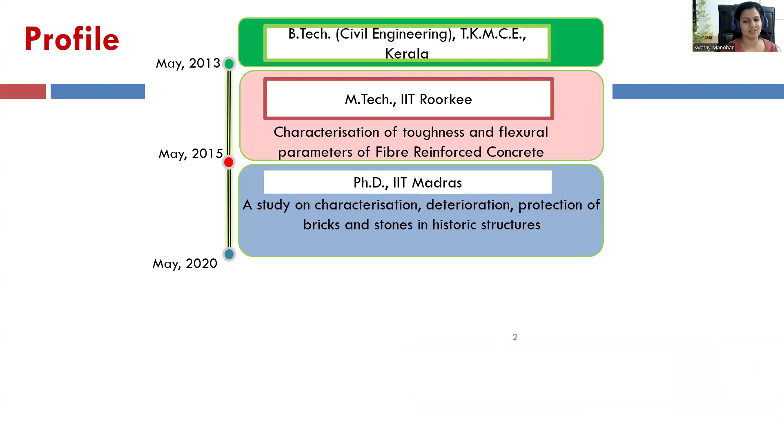I'll start with a brief bio of myself. I did my bachelor's in civil engineering from Kerala, India in 2013, followed by master's from IIT Roorkee. Then I did my PhD from IIT Madras, where I worked on understanding degradation mechanisms in historical structures, basically salt crystallization phenomena, followed by a brief postdoc at IIT Madras and an early career fellowship at IIT Gandhinagar. Then I joined IIT Bombay as an assistant professor in 2022. I had a brief stint at ETH Zurich as a visiting faculty from September to December 2024 as well.

Now I'll start with a roadmap for the next 15 to 20 minutes. I'll talk about what is salt crystallization, why does it happen. Then I'll go more into the role of the pore system of the materials in governing salt crystallization. We will do this on the basis of 3 different case studies: building stones, fired clay bricks, and lime mortars.

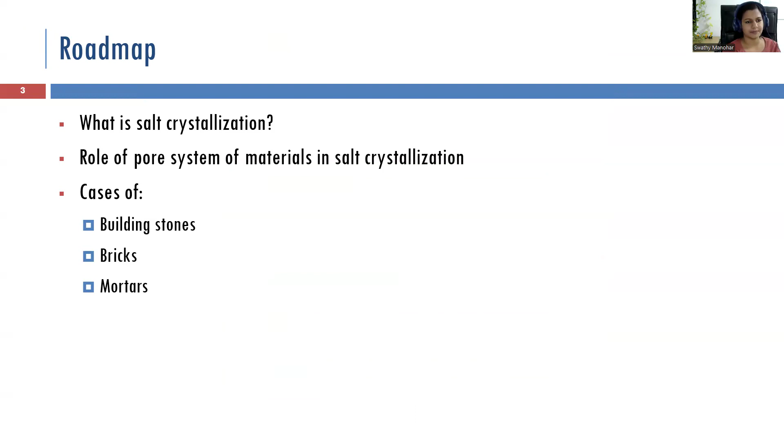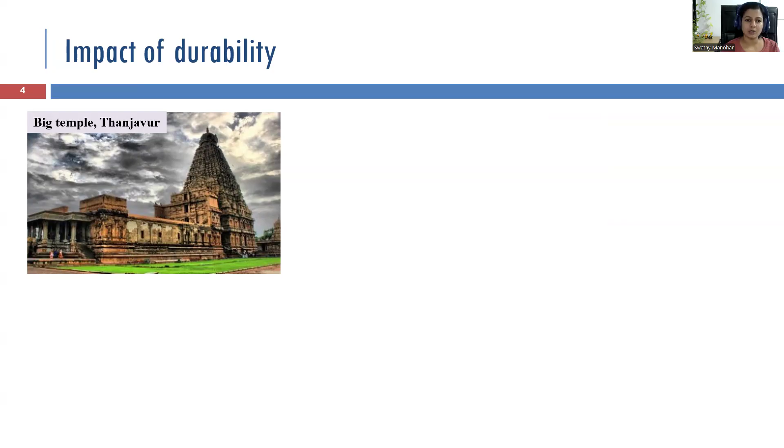Starting with the impact on durability. This is the Big Temple or Brihadeshwara Temple in Tamil Nadu, India, which is made of granite, constructed in 1010 AD, and is still sturdy. But if you look at modern structures, we see damages in less than 10 years or even much lesser than that.

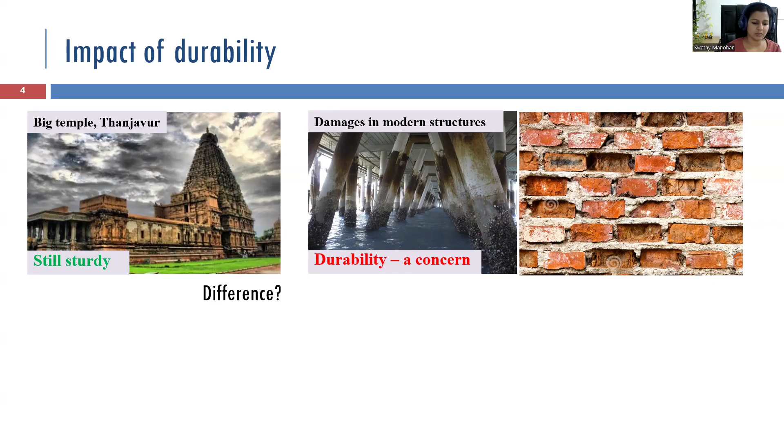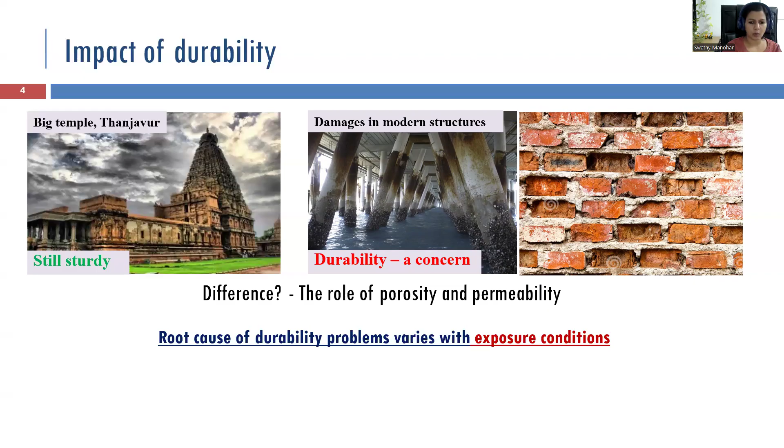The emphasis is that it's not the strength that determines the damage, it's the durability, which is basically because of the porosity and permeability of these structures. This response differs with respect to the exposure condition—if it's because of salt, wind, or air pollution—so there are different durability problems associated with different materials.

If we understand the mechanism of this degradation phenomenon and its relation with the microstructure, or porosity and permeability, can we actually scientifically design building materials for longevity? This is a potentially interesting question that we will be able to answer by the end of this presentation.

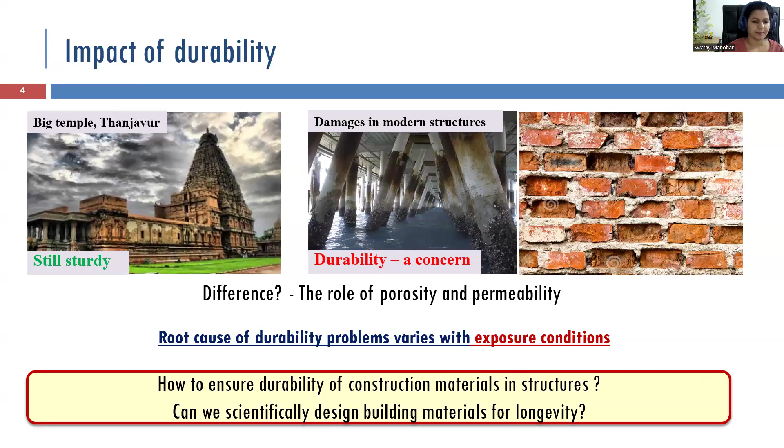Coming to salt crystallization, the first disclaimer is that it is one and the same as physical salt attack, especially when we talk about sodium sulfate. The general name for sulfate attack is generally chemical sulfate attack. But in physical sulfate attack, or physical salt attack, or salt crystallization, you will not have any chemical interaction between the salt and the substrate material. It's only the chemical reactions within the salt, or salt with water.

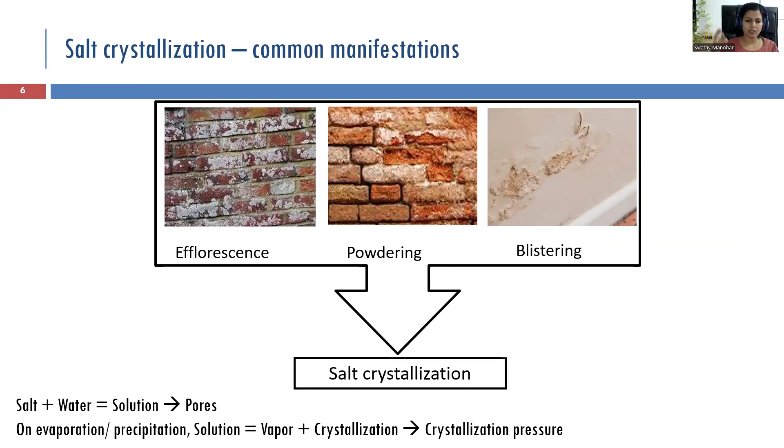What are the common manifestations of salt crystallization? Efflorescence, the white patches you see, powdering, blistering—all of this is because of salt crystallization, which is salt and water from the atmosphere getting into the pores of the system in the form of salt solution. What happens on evaporation? They slowly come out, the vapor will escape out and salt will precipitate on the surface, which is efflorescence, or the white patches you see.

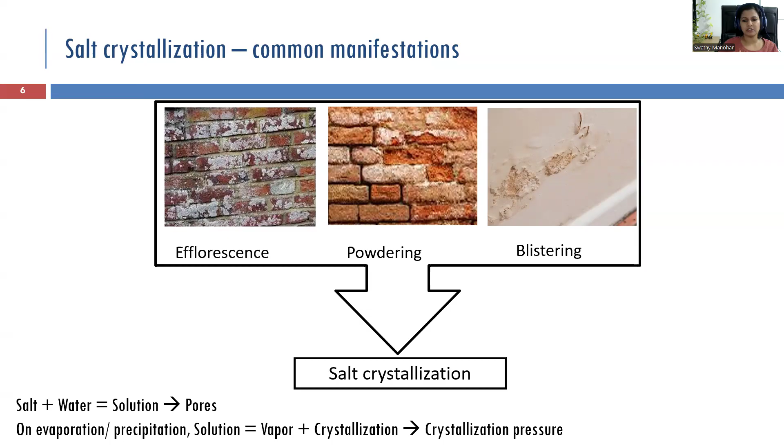If the evaporation rate is much higher, vapor could escape easily directly from the pores and the salt will precipitate inside the pores. This is more damaging because now the crystals can create something called crystallization pressure to the pore walls, which could damage your material.

This is called crystallization, which is identified as one of the most prominent damage mechanisms in historical structures. Not only in stone or brick structures, but even in concrete structures this is prominent. You see examples of concrete, stone, as well as brick structures which are susceptible to salt crystallization damage here, and the extent of damage it can go to.

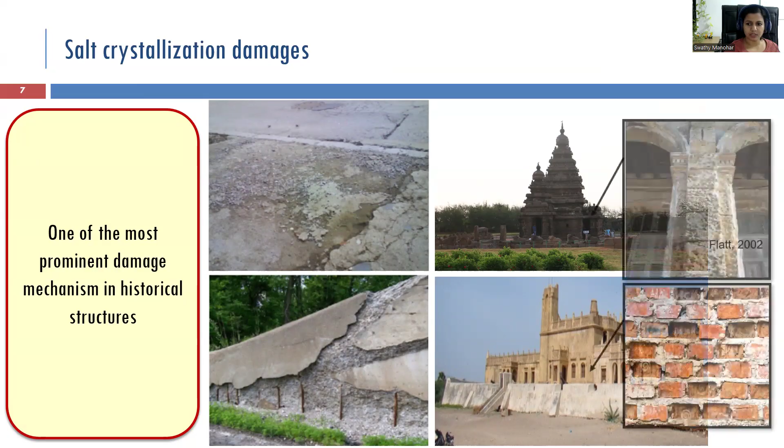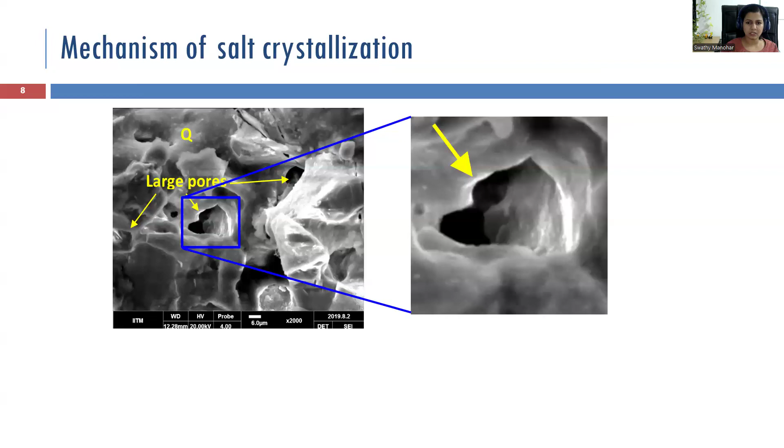What is the mechanism of salt crystallization? I'm going to show this based on one of the SEM images from one of my fired clay brick samples, which was found to have larger round pores. So in large round pores, with subsequent dry-wet cycling, salt solution gets in and becomes more and more concentrated or more saturated. When it reaches supersaturation, the crystal precipitates.

And you see, this is a large round pore. The crystal is free to grow in all directions. There is no restraint or constraint for the growth, so it will not cause any pressure to the pore walls. It's free, stable, settled there, growing. So in larger pores, crystals are free to grow in all directions, so it doesn't cause damage.

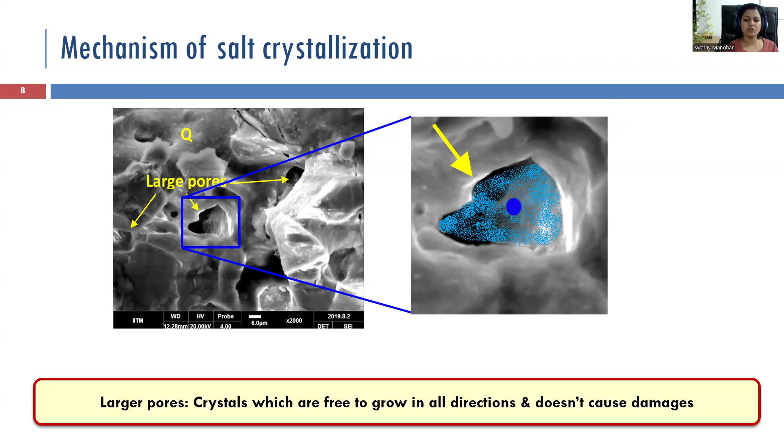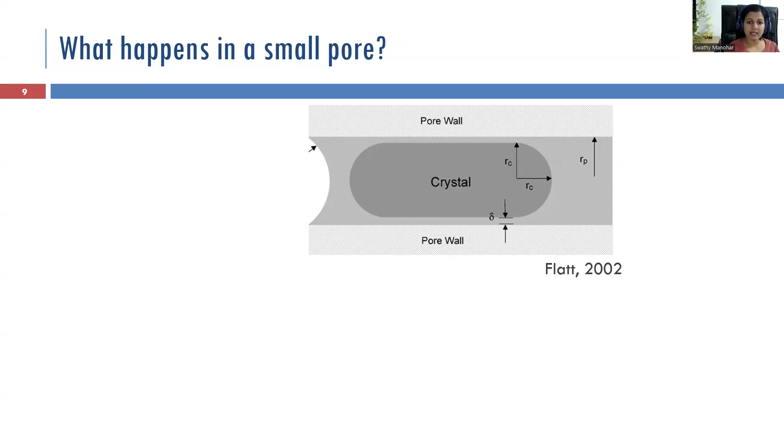This is not the case in a smaller pore. Here you are seeing a smaller cylindrical pore with pore walls on the sides and the crystal being stabilized inside. The crystallization pressure will arise here based on the thermodynamic balance of Gibbs free energy. I want you to look at the crystals first at this end. The ends of the crystal have a hemispherical shape, hence the curvature is very large there. The solution touching that curvature should have a very high supersaturation to balance the free energy there.

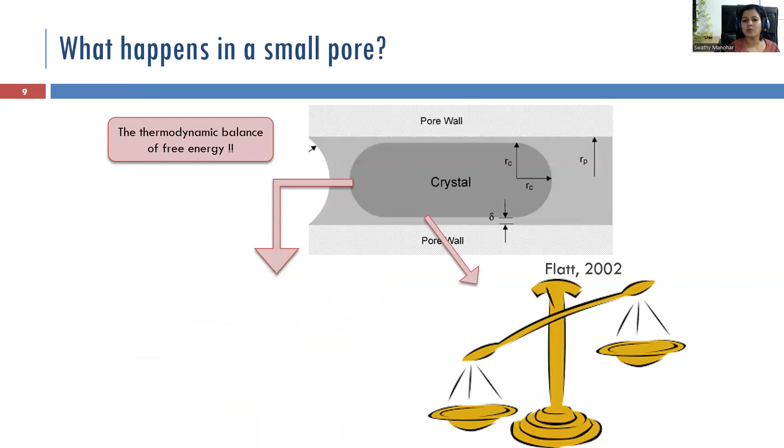The supersaturation of the solution is going to be very high in the water or in the solution to balance this high curvature. But on this side, the curvature is almost half of the curvature at the hemispherical ends, so it's very small. But the supersaturation of the same solution is already very high.

So the Gibbs free energy associated with this excess unwanted supersaturation will generate some crystallization pressure acting on the pore walls. This crystallization pressure and the smaller curvature will balance the high supersaturation here.

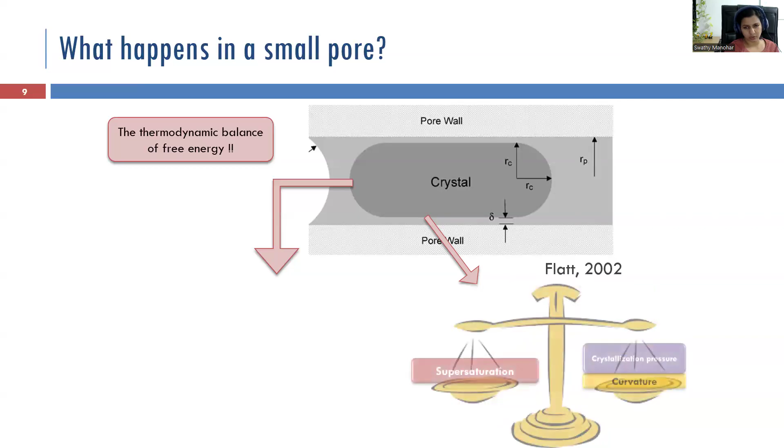Now you have crystallization pressure on the pore walls. This will generate hoop stresses around the pore walls. If the tensile strength of your material is higher than this hoop stress, you will not face damage. But if the hoop stresses are higher, you will have cracks and damage initiated. That is how crystallization pressure causes damage in your system if you have smaller pores.

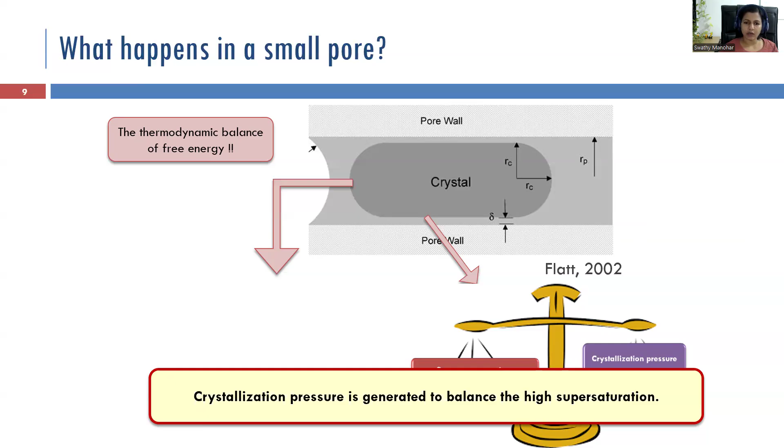Now we look into the case studies.

First is a case study of a building stone, a highly porous limestone called coral limestone or coral stones, from Sri Ramanathaswamy Temple in Rameswaram, India. What you see here is the X-ray diffractogram and scanning electron microscopy of the material.

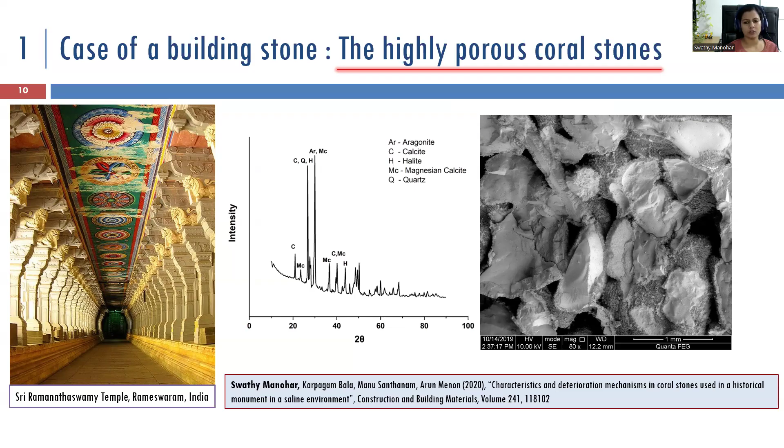The speciality of this particular stone is that it's very light. The density is very close to water, so it can actually sometimes float in water. Looking more into the microstructure, we found that the quartz crystals are surrounded by a lining called magnesium calcite, which had a flowery petal-like morphology, making the overall material much lighter and porous.

Because of these larger pores in the system, when we subjected this stone to accelerated salt weathering, we saw it had very high resistance to salt weathering. Now you know why: salt can easily go and get deposited in the larger pores, and there are not many smaller pores in the system, which helps avoid damage.

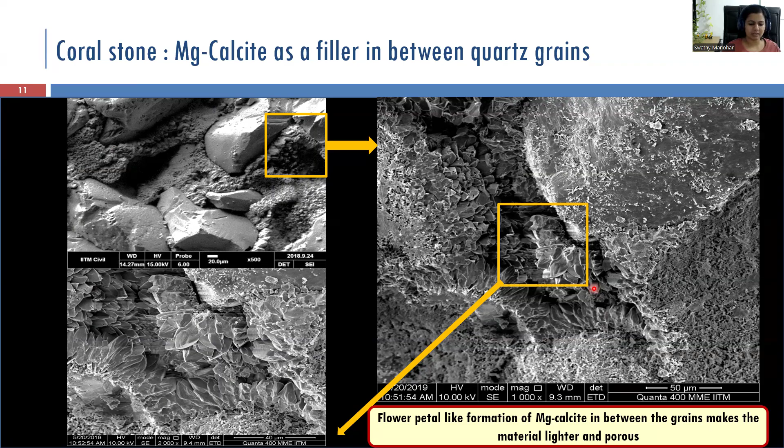Another interesting observation was that there was larger, more porous magnesium calcite lining, and also smaller porous calcite. But when we looked for precipitation of sodium chloride crystals, we saw the crystals were only in the larger magnesium calcite pores, not in the smaller calcite pores at the bottom. The reason is something called preferential deposition of salt precipitation.

This is because when you have connected large and smaller pores, the supersaturation will drain from the smaller pores to the larger pores, and crystals would deposit in the larger pores, sparing the smaller pores. This would also be one reason for the high salt weathering resistance of the coral stones.

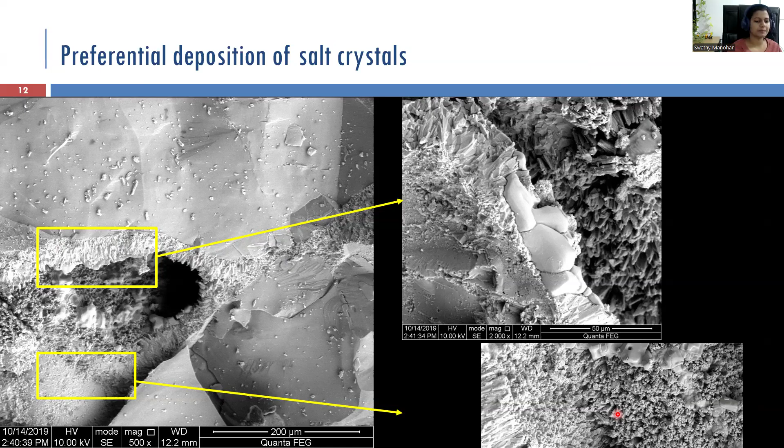Now we go to the second case study, which is fired clay bricks.

These are porosity data of different fired clay bricks of different porosities. In the histogram for one sample, for example V1, out of 100% porosity we have divided it into pores of different size ranges. For V1, the blue color, which is 30%, is the macroporosity, pores between 10 to 100 micrometers, and the top is the microporosity.

Everything in the red boxes are the same samples after weathering. So this is V1 before weathering and this is after weathering. What I want you to see is the last two cases, sample C1 and C2, which have larger pores in C1 and smaller pores in C2.

After weathering, you see that in C1 the macropores remain the same, with no much change. Small redistribution occurs in the microporous range. Whereas in C2, macroporosity increased so much, almost double.

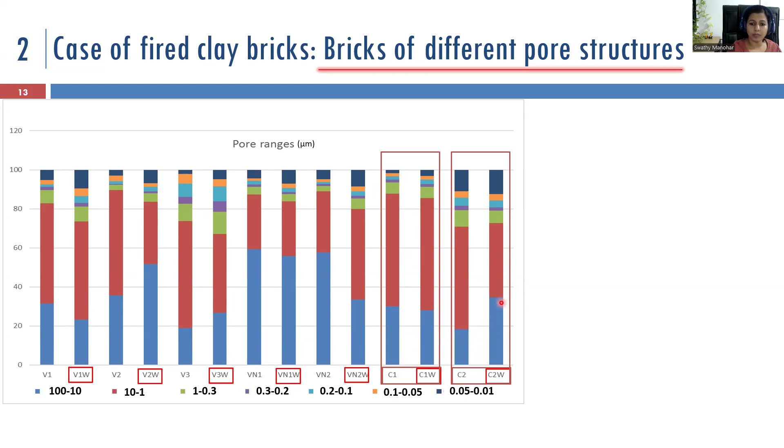Now you see how the manifestation looked like. C1 did not have much damage other than superficial mass loss, which is progressive. But in C2, total crumbling of the sample occurred. Do you want to know why? In C2, the microporosity was close to more than 15%, but C1 had much smaller microporosity.

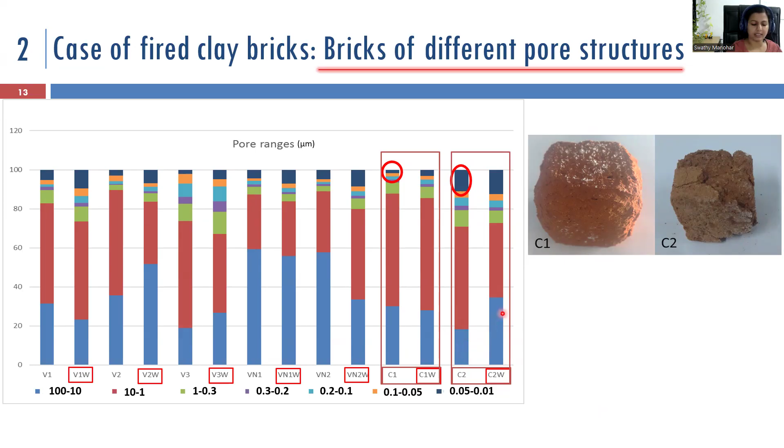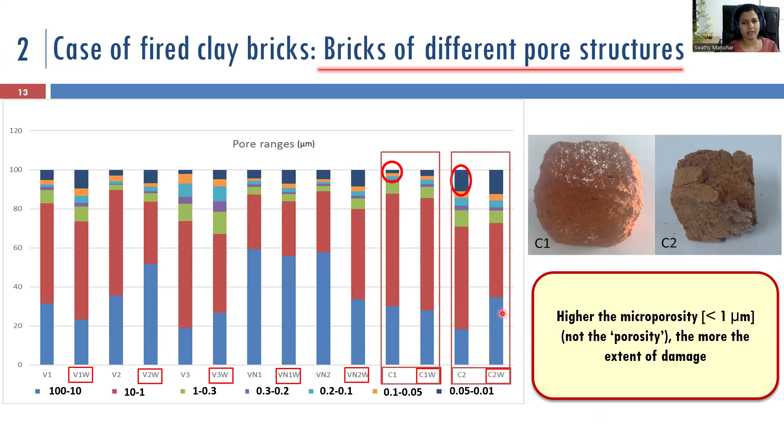We already know that salt crystallization will happen only in these micropores, which are damaging. This material had a large amount of microporosity, which resulted in damage, and you can see here how more cracks and fissures are formed in the material. That's why the macroporosity is increasing. The major conclusion is that if the microporosity, which is pores less than 1 micrometer, is higher, the more susceptible it is to damage. So it's not the total porosity we should worry about, but the percentage of microporosity in a system.

Also, it has smaller ionic sizes which can go into the smaller pores and get deposited, not causing damage in the samples. Now, comparing the efficiency of different coatings, we also saw that the second one, which is a silicone-based coating, performs very badly because it would be acting as a complete sealant over the samples.

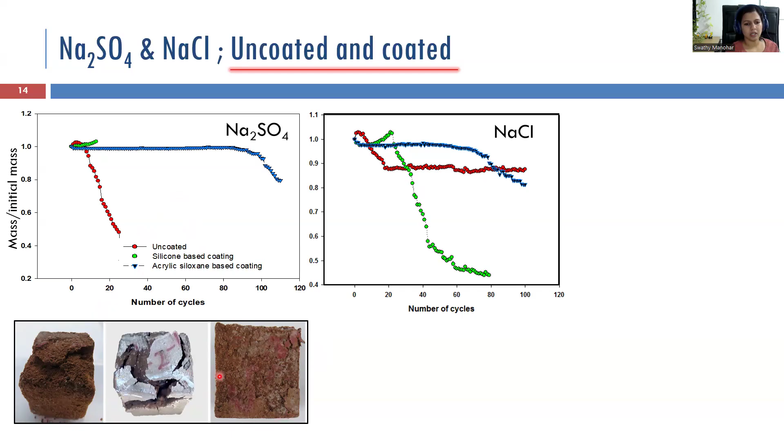Which would create stresses inside the material and cause it to crack and open up. But when we have acrylic siloxane based coating, which has a tendency to form cracks during the exposure period, it would help in releasing the stresses out. So if we are giving the right coating which is compatible to the particular material and salt, it would perform better in the long term. Same is the case with sodium chloride as well.

So the takeaways are: with sulfate, it is crystallization damage. But in case of sodium chloride, only salt deposition happens inside the material in the micropores. Coming to the coating, sodium sulfate exposure in microporous bricks, which are more damaging, needs a breathable coating compatible to the matrix, which is found to be acrylic siloxane based coating here.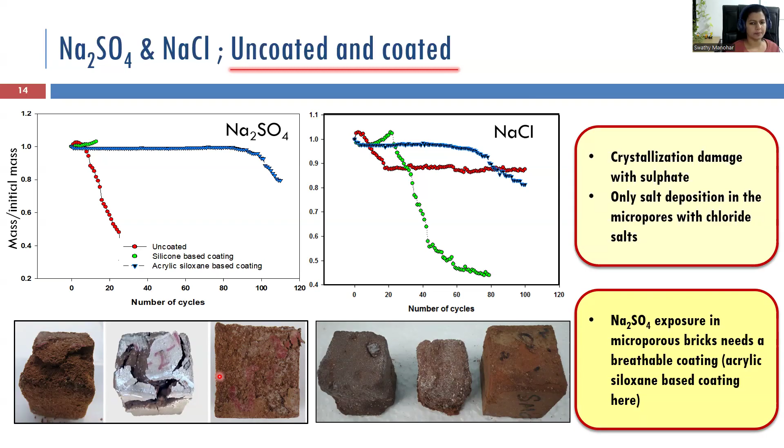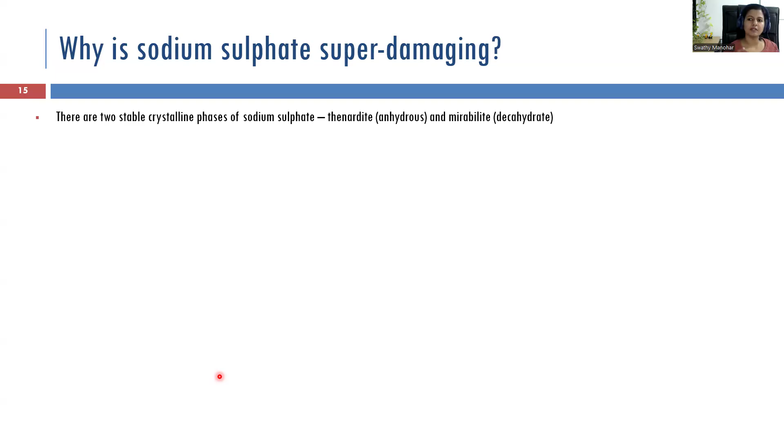Why is sodium sulfate salt super damaging? This is the same reason why we choose sodium sulfate in all accelerated weathering tests as well. There are two stable phases of sodium sulfate: one is thenardite, which is sodium sulfate anhydrous, and one is mirabilite, which is sodium sulfate decahydrate. The direct transformation of thenardite to mirabilite, which was believed to happen in earlier cases, is actually not happening because of some lattice mismatch.

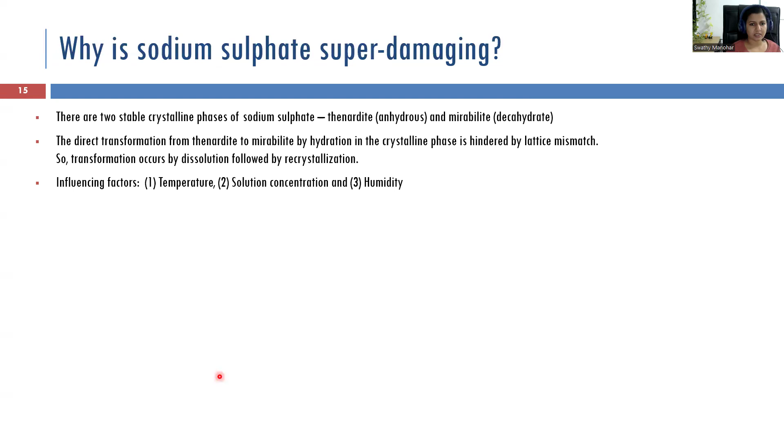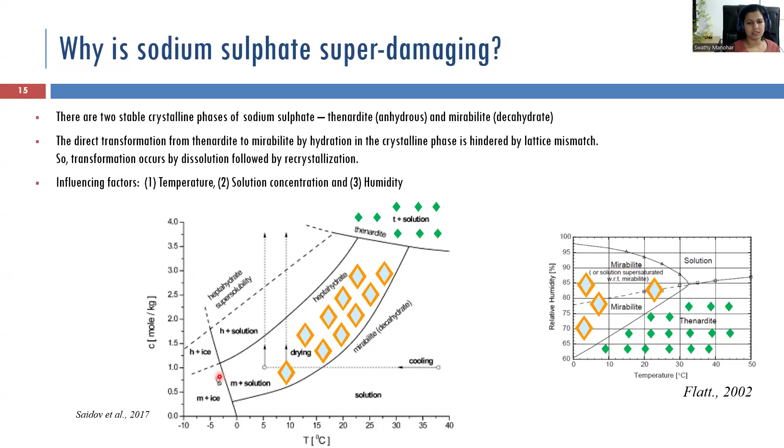Therefore, transformation occurs by a process called dissolution mediated crystallization, which I'll explain in the next slide. The factors influencing this are temperature, concentration of the solution, and humidity. These are the phase diagrams of sodium sulfate, where you can see that mirabilite, sodium sulfate decahydrate, will form only at particular temperature and humidity, which you can easily assess from these graphs available everywhere. And these are the thenardite regions, the green colors denote thenardite, which also happens at larger temperatures and higher concentration.

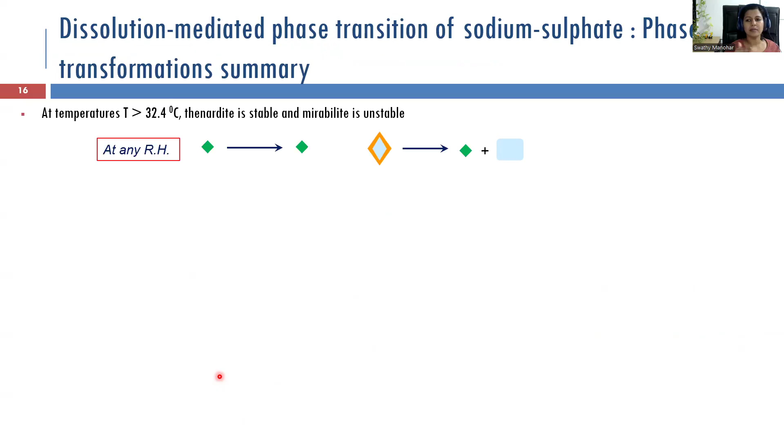Now I'm explaining what I told in the previous slides in a simpler way. At temperatures more than 32.4 degrees Celsius, based on the previous phase diagrams, only thenardite is stable and mirabilite is unstable. So green is thenardite. At whatever the relative humidity is, if the temperature is higher than 32.4 degrees Celsius, mirabilite will convert to thenardite and water, so you will see only thenardite in those systems.

When the temperature reduces to less than 32.4 degrees Celsius, if the relative humidity is high enough, then mirabilite is stable. But if the relative humidity reduces below something called the relative humidity critical, then thenardite is stable. So if the relative humidity is smaller, mirabilite will convert to thenardite. Thenardite will remain thenardite at lower temperatures, but at lower temperatures, if the relative humidity is higher, mirabilite is the stable phase. But thenardite cannot directly convert to mirabilite because of lattice mismatch.

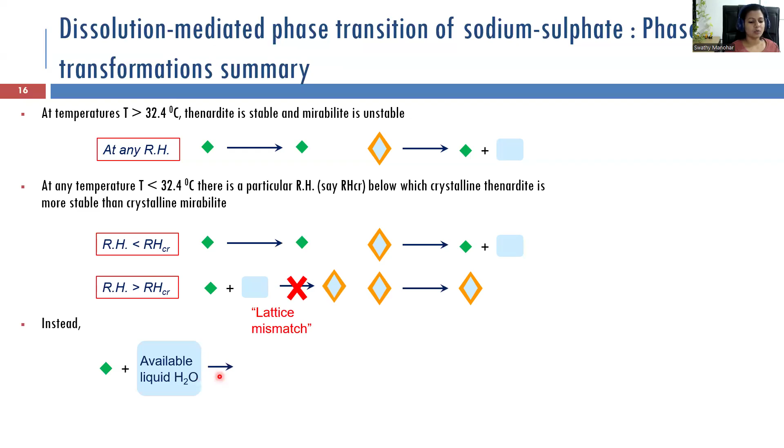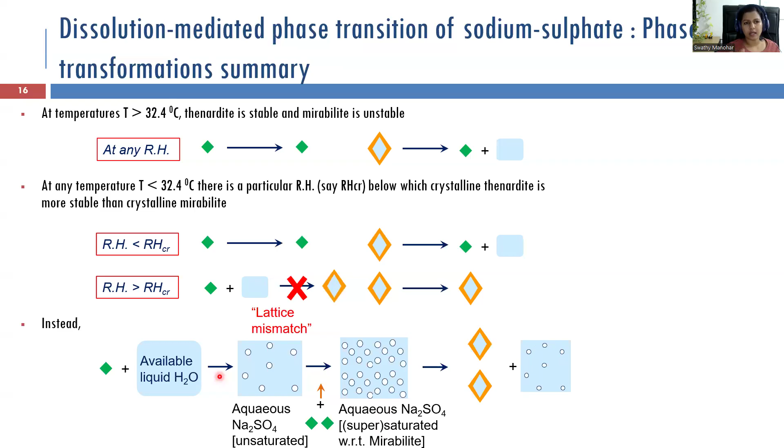What actually happens is thenardite dissolves in water and forms aqueous Na2SO4 solution, and more thenardite dissolves in that, forming supersaturated aqueous Na2SO4. When it is supersaturated, you get mirabilite crystals precipitating out of it. Now you have more mirabilite crystals in the system, which are larger in size and expansive in nature, which create crystallization pressure at the pore wall and cause damage.

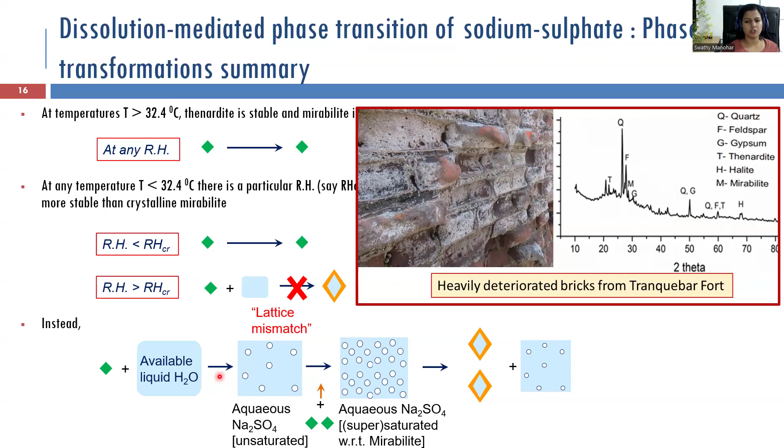Even though this is our theory, it has been experimentally observed and investigated in one of our case studies, which we did on a brick fort wall in Tranquebar in Tamil Nadu, which was severely damaged because it was exposed right at the seashore with marine conditions and very high relative humidity.

The last case is lime mortar, where we looked at pore sizes and salt weathering impact. We had two different sets of lime mortar: standard ones with just lime, aggregate and water, and modified lime mortars with organic additives.

As organic additive, we use cane sugar, otherwise called jaggery, which is a traditionally common organic additive used in India. The use of any carbohydrate-rich organic like jaggery appears to greatly improve the fresh and durability properties of lime mortars. That's why it was used since ancient times, but the phenomenon or dosages are not clearly known.

They are said to cause slow carbonation during the initial period before the pore solution dries, providing good conditions for diffusion and dissolution of larger amounts of CO2 inside. They coat around the calcium hydroxide particles, inhibiting initial nucleation of CaCO3, so CO2 can easily get into the system and have better carbonation.

This is a live microscopic image of the fresh sample, where you can see calcium hydroxide particles surrounded by a layer due to absorption of the organic additive into the system, which prevents initial nucleation.

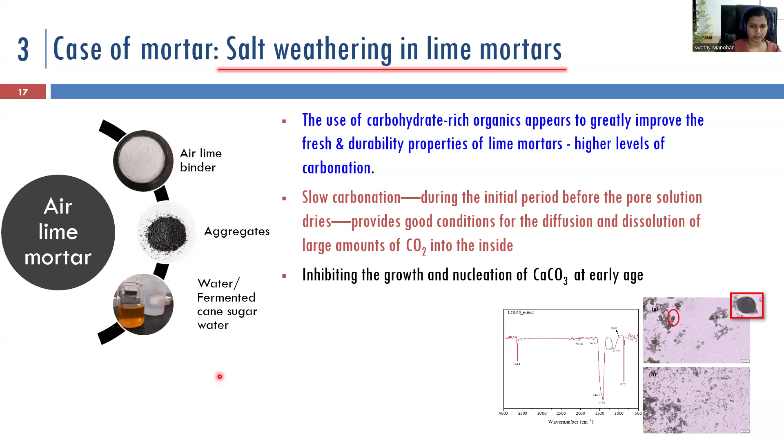When we subjected samples modified with organic additive and without organic additive to artificial salt weathering, the black line, which is the control sample without organic, failed at around 25 to 30 salt weathering cycles. But with jaggery in the system, it performed well even at a larger number of cycles.

Even though it was not looking great, it had high amounts of efflorescence, which is actually not damaging to the material—it was precipitating outside the material.

This could be because of the presence of larger, uniform pores, and better uniform carbonation in the system when you have jaggery or carbohydrates present, which is actually to be investigated more.

This is our illustration from the understanding we developed. The first one, with pure lime mortar, could act as a salt accumulating system with smaller pores. Salt could accumulate and cause damage because of crystallization pressure.

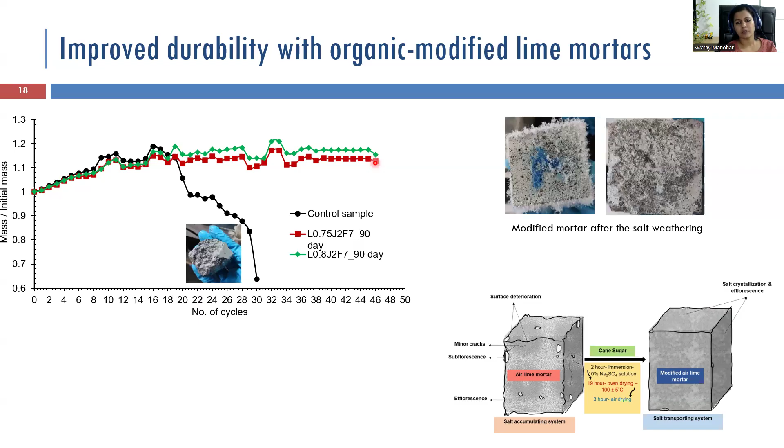But with modifications in the system using organic addition, especially fermented jaggery, you get larger uniform pores generated, which prevent salt accumulation. Instead, salt transporting could happen, enabling formation of efflorescence on the outside and preventing subflorescence formation.

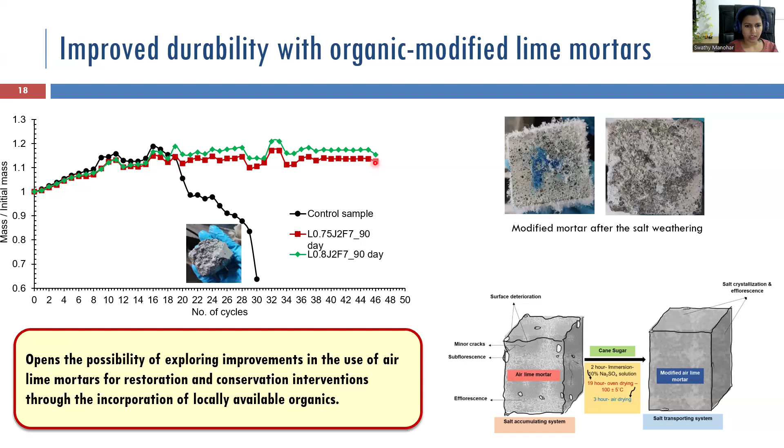This also opens the possibility of exploring improvements in the use of lime mortars for conservation practices by incorporating locally available organic additives.

Summarizing what I have talked about so far, the parameters influencing the material's salt crystallization resistance are divided into two: pore size and connectivity. In pore size, C1 and C2 were the samples representing larger pores and smaller pores.

Larger pore samples always behave better with salt crystallization because salt can grow in all directions in a larger pore—it will not cause crystallization pressure. But in a smaller pore, it will cause crystallization pressure and damage the pore walls. Coming to the second parameter: degree of interconnection.

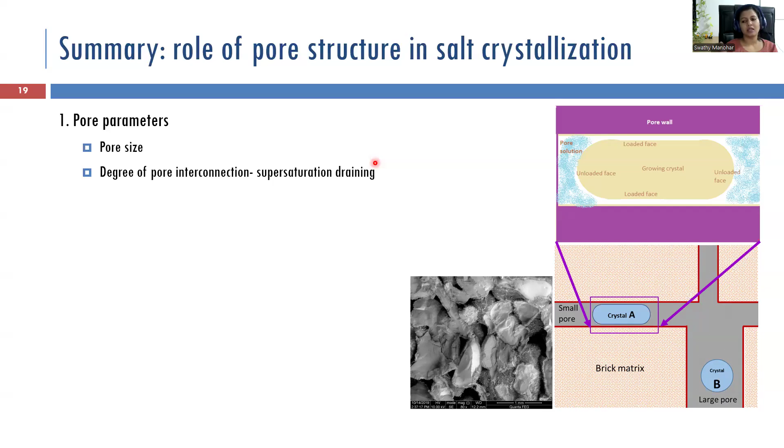Even if you have smaller pores in the system, if they are well connected with a larger pore, supersaturation draining would occur and the crystal would always have preferential precipitation in the larger pore. If it precipitates in larger pores, you will not have any damage.

Now the last factor is the grain strength. Even if everything supports crystallization and formation of pressure, if the pressure generated, which creates hoop stress, is lower than the tensile strength of your material, then again you will not have damage.

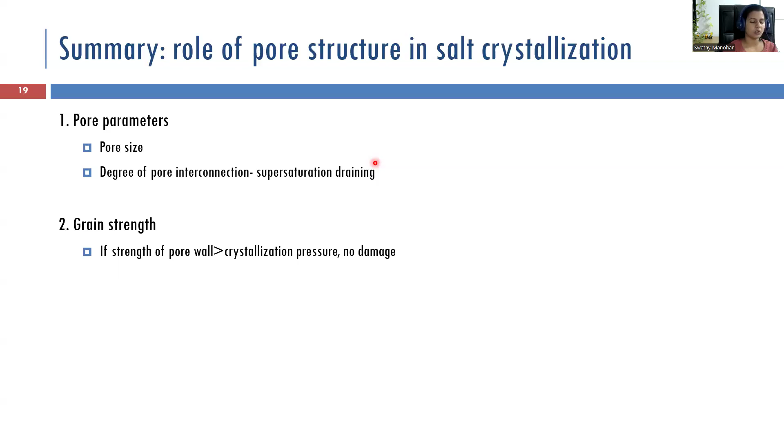So if the material's grain strength is higher than the crystallization pressure, then again you will not have any damage in the system.

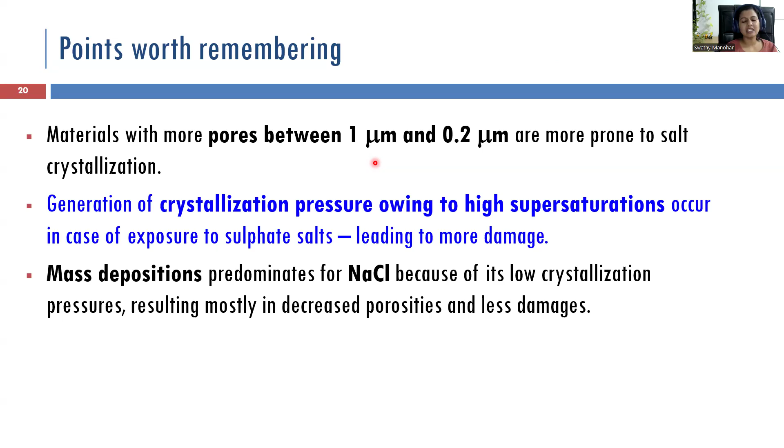Second point: in sodium sulfate salt, crystallization pressure would be generated owing to high supersaturation, which could lead to more damage. But in sodium chloride, mass deposition predominates, where the crystals precipitate in the pores, increasing the mass of the system. Thus decreased porosities and less damage would result.